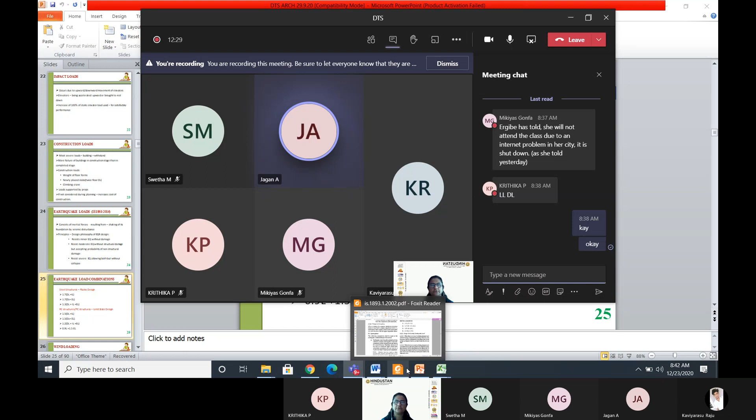Did you download 2016 or which code, IS 1893? 2016, ma'am, let me check it again. Okay. Anyway, 2016 - I have only 2002 with me at present, but there is a slight difference between 2016 and 2002, though the procedure remains the same.

So Jagan will put the 2002 one, see that, you have to refer that. Today I will just share it and go through that IS code quickly.

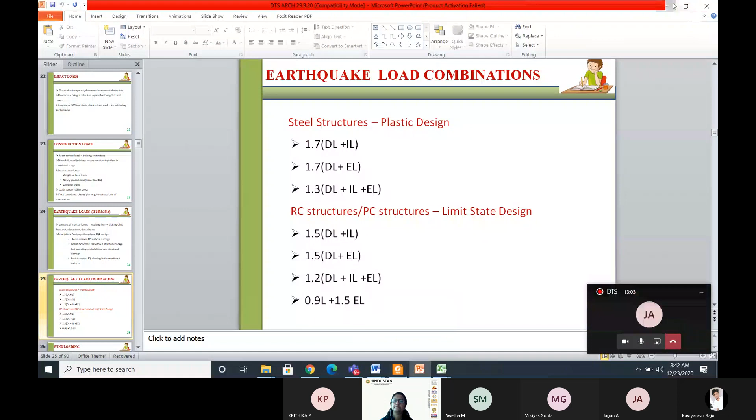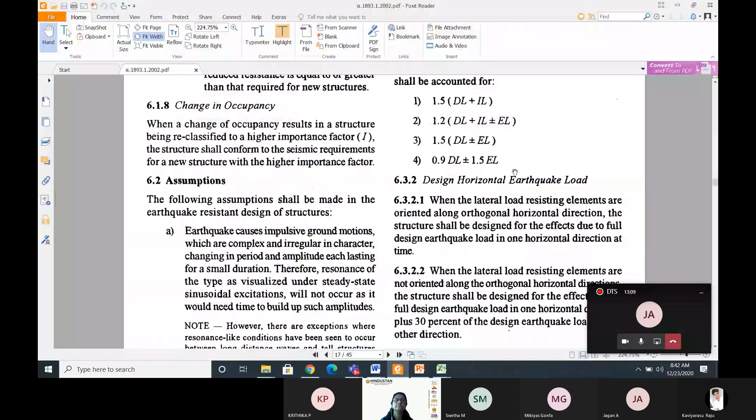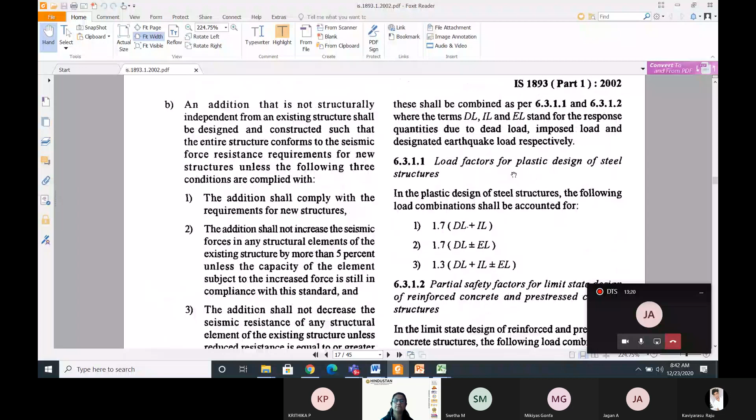Can you see the screen now with the code? Yes, ma'am. So this is your IS code revised in 2002. Ma'am, IS 875 part 3 is 2015, ma'am. And IS 1893 part 1 is 2016. So you have to refer that only.

Okay, yes, next class I will refer that because Jagan will forward that. Uploaded, ma'am, uploaded. You can view that also, ma'am.

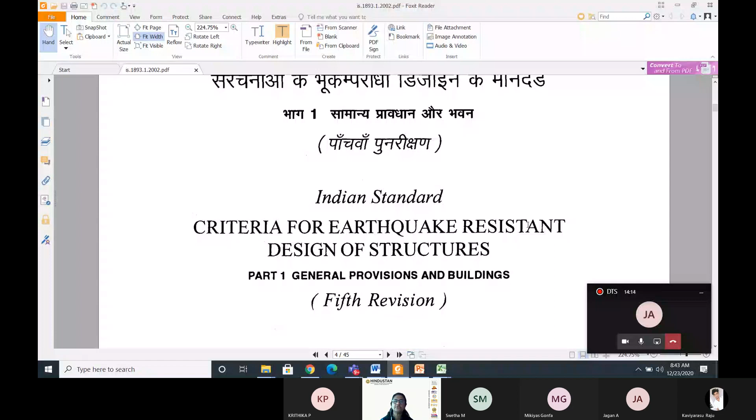Okay, good. So IS 1893 gives the criteria for earthquake resistant design of structures. So all the earthquake load calculations are taken from this particular code.

So everybody should go through the code and understand, because here Part 1 is the general provisions, Part 2 is liquid retaining structures, Part 3 is bridges and retaining walls, Part 4 is industrial structures and Part 5 is dams. We will be dealing with Part 1, the general provisions for buildings.

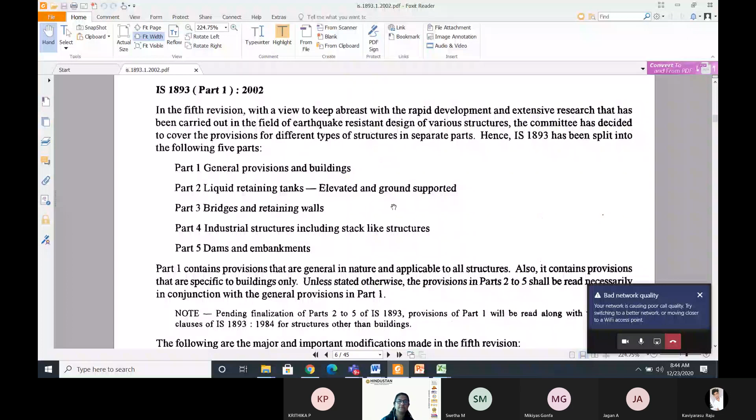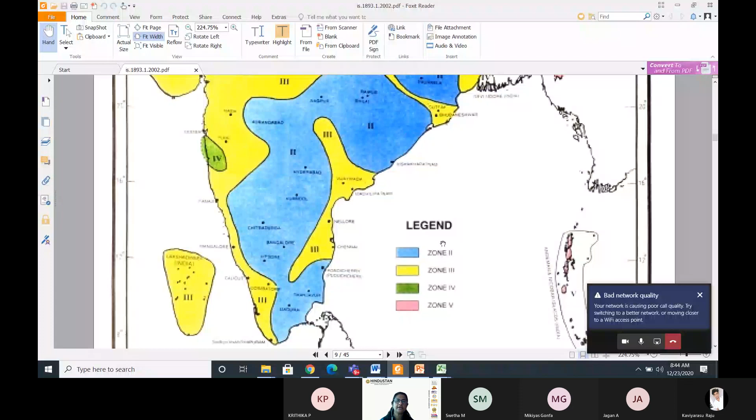Okay, so here you have to refer - I will just show the India map. So here we can see there are zones 2, 3, 4, and 5, and the entire India is divided into 4 zones. Zone 2 is the lowest, and zone 5 is the highest earthquake prone area.

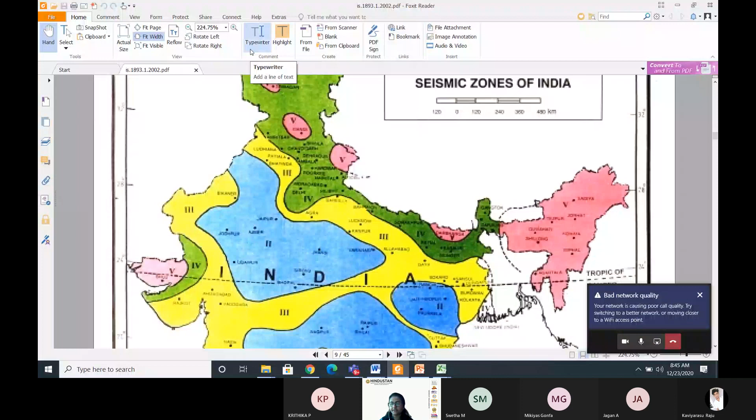So we can see the north and northeast part of India is highly seismic, that is this zone. And here again, the northern part is zone 4. Chennai, we can see, is in zone 3.

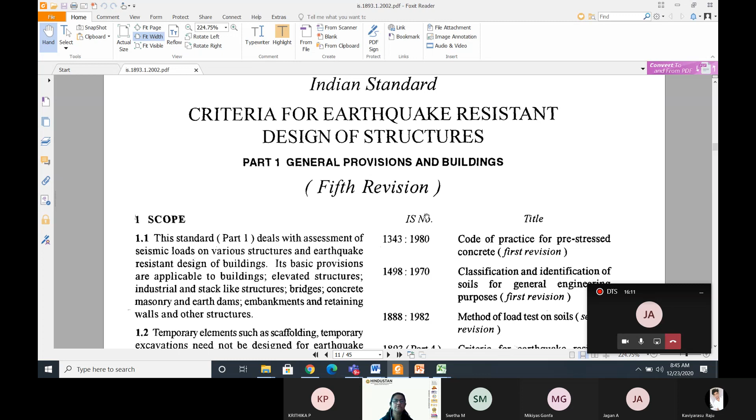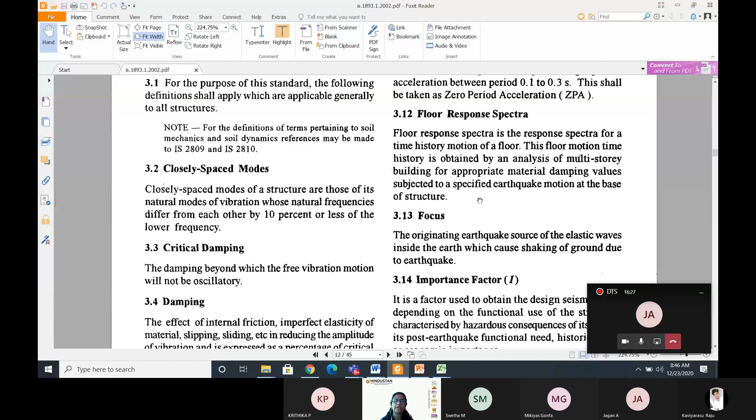Okay, now, terminologies are given here - some terminologies of earthquake engineering. All these things you have to read, because at present your syllabus is concerned with the load and how to calculate earthquake load. So we need to read all these terminologies used - what is importance factor, what is intensity of earthquake, what is liquefaction - all these terminologies, please go through that.

There is magnitude of earthquake - how the magnitude of earthquake is measured, it is a measure of energy, and it is defined as the logarithm to the base 10 of the maximum trace amplitude expressed in microns.

The energy that is released - as I was explaining in the initial classes, when an earthquake happens, the strain energy that is stored in the material, rock in the molten region under the entire tectonic plates, it is moving. So during that motion, whatever energy that is stored will be released. The strain energy stored in the earth material will be released. So that release is the energy.

That energy will travel in the form of waves, in the form of seismic waves. So primary waves, secondary waves, Rayleigh waves, Love waves - different forms of waves. So this energy which is passing in the form of waves.

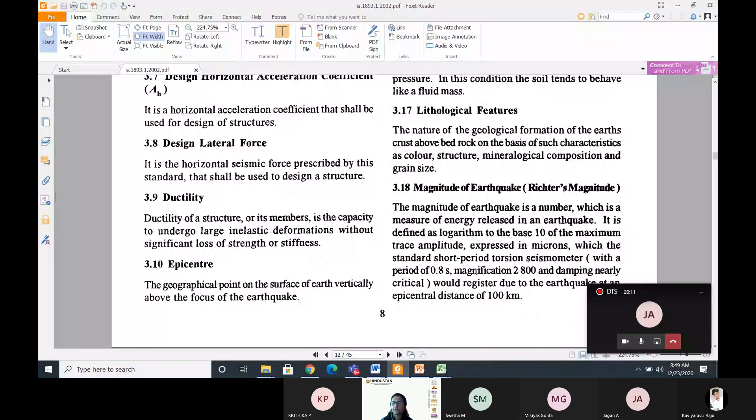The magnitude is usually represented in terms of intensity between 1 to 10 - we say it is 3, 3.3, 4.5, 6.8, 7.9, 9.8. So as it increases, the intensity or magnitude of the earthquake increases. That is what the magnitude of the earthquake is. There are different magnitude measurement systems; what we follow in the Indian standard is the Richter's magnitude.

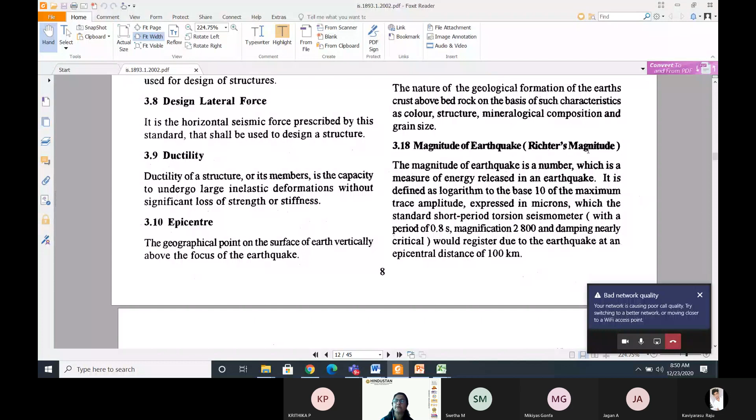So now it goes there. Then finally, I'm not going to explain everything - this is beyond the scope of our syllabus. We have a seismic mass.

How many of you have learned this? Anybody else have learned this? Any? I should know how much I can explain. Other than Kaviyarasu, anybody else learned this earthquake resistant design? Can you hear me?

Ma'am, can you show the slide once again? Please give response - which one? This slide. This one, the code. Are you not able to see the code? Yes ma'am. I'm asking about this code provisions.

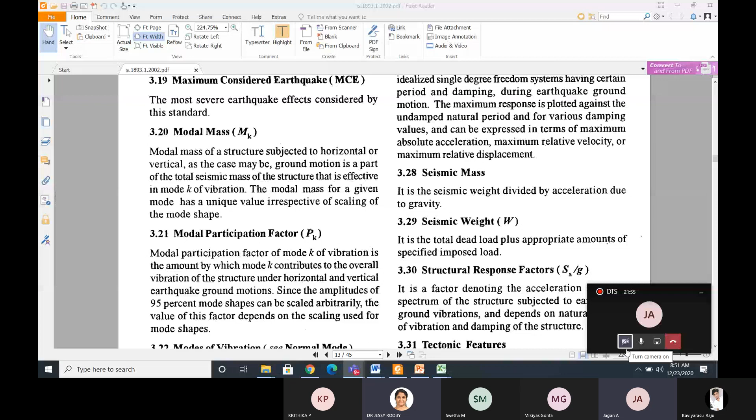How many of you have learned this in your UG class? Did they learn it? Ma'am, I don't remember ma'am, maybe it would have come in structural dynamics in 7th sem ma'am, I don't remember ma'am. That must have been it - so you others also, Swetha and Krithika? Ma'am, no ma'am, no. Okay. Mikias.

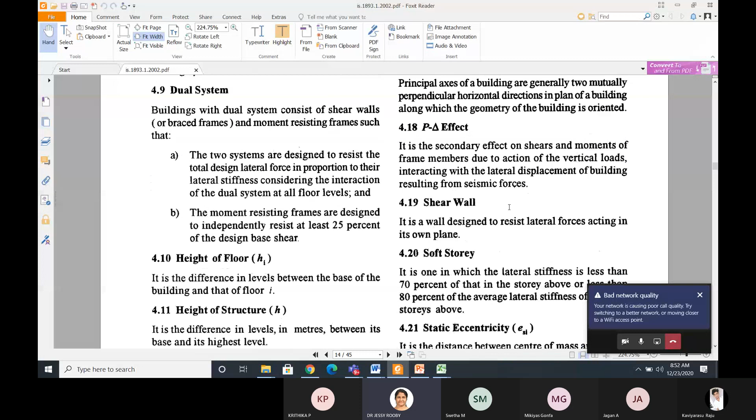Think - okay, so structural dynamics. There was one unit like the initial engineering seismology, isn't it? So please go through this. We'll derive the earthquake load, how to calculate the earthquake load. So here there are some terminologies available, the general principle of how earthquakes are happening - what I was explaining just now.

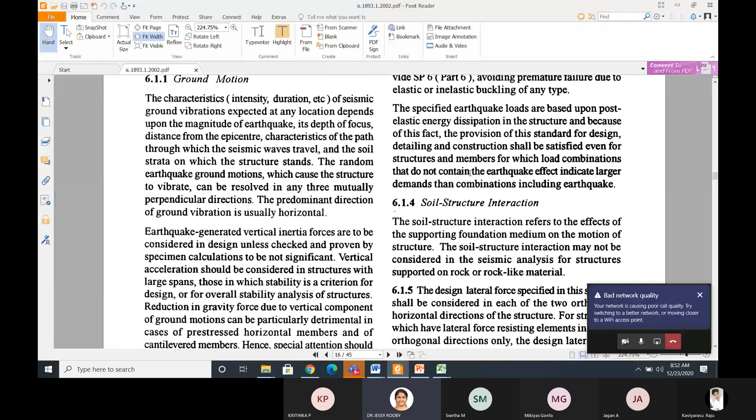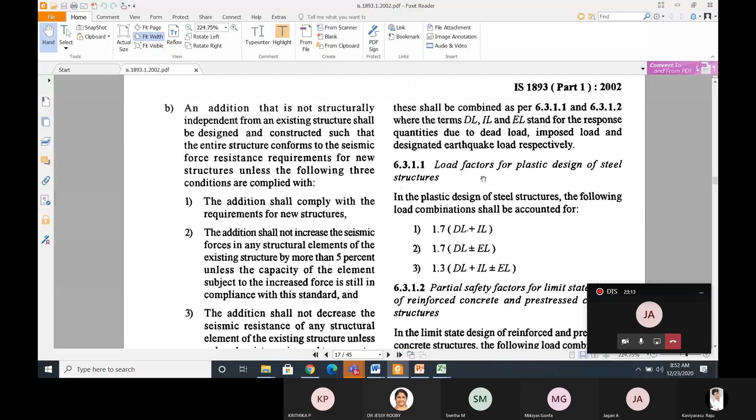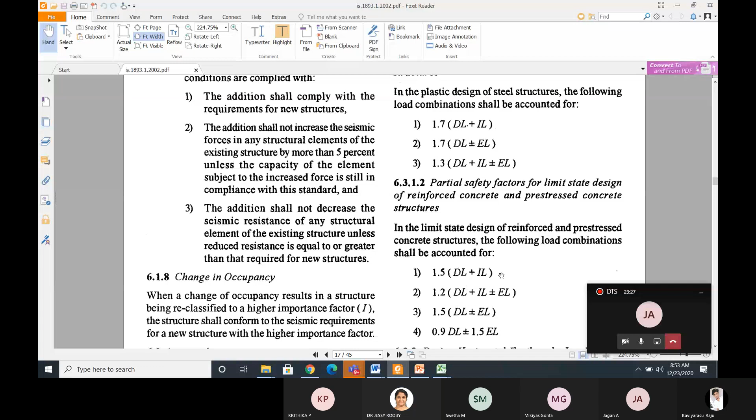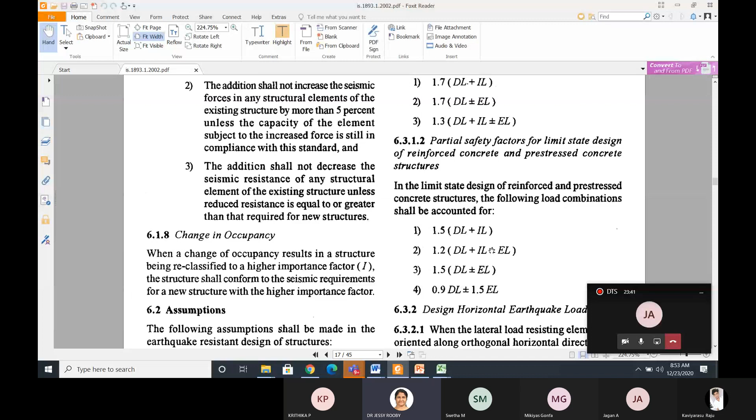Now here, this is what I am interested in, our design of tall structures - how do you consider the load? I have explained the load factors for plastic design of steel structures, and if it is for an RC or pre-stressed structure, how the load has to be taken. In the last 1.5, all these are the partial safety factors for dead load and live load. If there is an earthquake load also coming, the partial safety factor is less because I told you both will not act simultaneously, so the partial safety factor can be less. Now there is one more here.

If lateral load resisting elements are not oriented along the orthogonal directions—that means if there is a shear wall, or columns or any other solid vertical elements in all directions to resist the earthquake—then we can't predict that the earthquake will come only in the X direction or only in the Y direction. There are different types of waves: some travel longitudinally, some in other directions, so the structure will be affected. We cannot predict exactly which direction the earthquake forces will be in, so we need to take all directions: X, Y, Z. Depending upon that, the earthquake load also has to be taken, as I was explaining last class.

The predominant direction, we can take 100% force in the X direction plus 30% in the Y direction. And here everywhere you can see a plus or minus. Can you tell me why the loads are taken plus or minus?

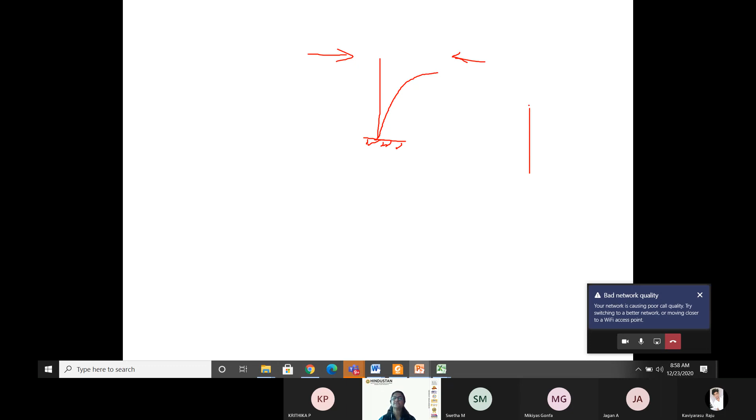So this earthquake load, suppose if it is coming here, the building can move in this direction. At the same time, the load can be in the opposite direction also. So if a structure is there, your dead load is also acting in the downward direction, and your live load also—so this is my gravity direction, this is my positive direction. So this is the dead load plus live load.

You cannot say live load is always in a different direction—it's a gravity load, downward direction. So your dead load and live load will always be added together, because this direction cannot change. The dead load is always gravity towards downward, live load is also in the downward direction. So it is always dead load plus live load.

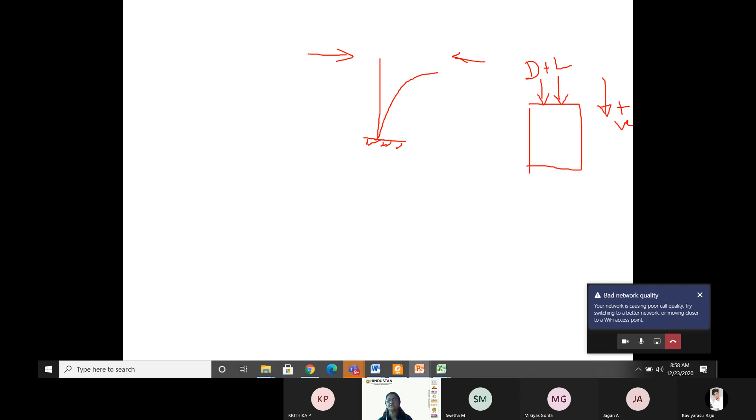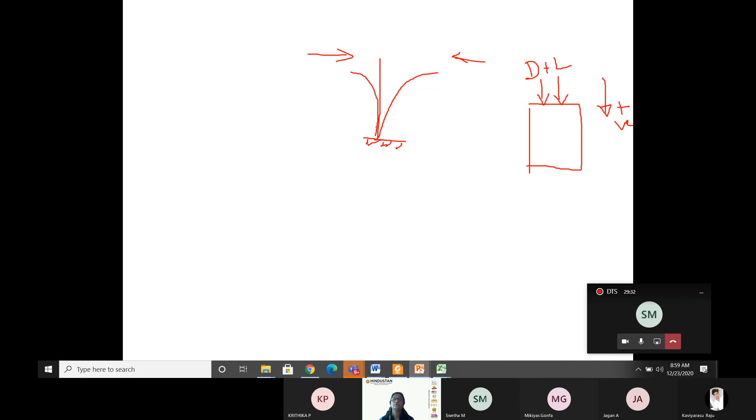But when there is an earthquake, I cannot say it's only one direction of load. The earthquake can come either in this direction or in the other. Depending upon that, the building will sway this way or that way—it may move in then move onto this direction, then come back here. So it is like a cyclic load pattern.

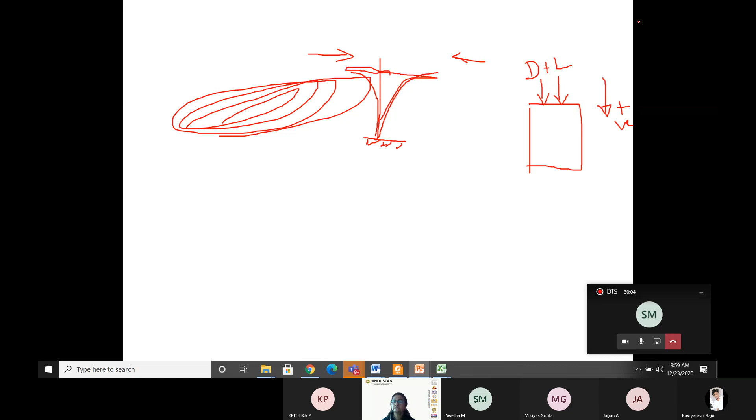Here it is coming, it can be in the plus direction or it can be in the minus direction. Is it clear? Is it understood? Yes, ma'am. Hello, please give immediate response.

What Mikiyas is telling—there's a different code called EBCS. Can you explain, can you expand it, Mickey? So in Ethiopia... maybe I don't know the expansion of that. So depending upon the country, that's what I told you—this is different, because there's another code in Japan. We cannot follow the Indian standard there because earthquakes occur frequently in Japan, so their codal provisions are entirely different from those of India. So you people should refer to other countries' codes as well, because we are in India learning about the Indian standard—this standard can be used only when... regarding the Ethiopian building codes, you should refer to those instead.

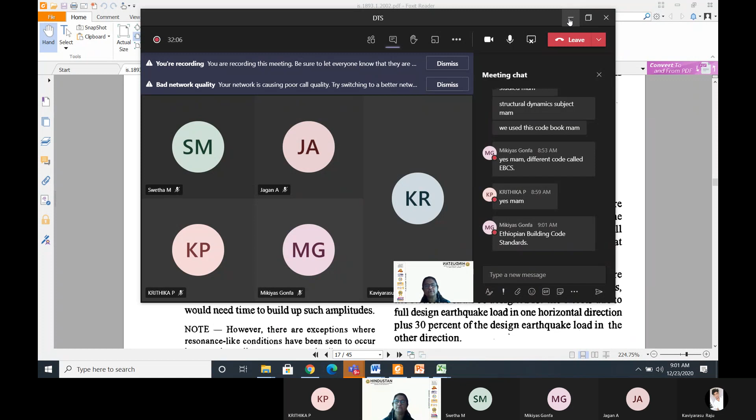Very good. So in India, we have a national building code, NBC. Based on NBC only, we do all the construction. All your size, carpet area, entire building standard is given by the national code. Similarly, every country will have a different code. You have to refer to it whenever you need these things. That is how you improve your knowledge.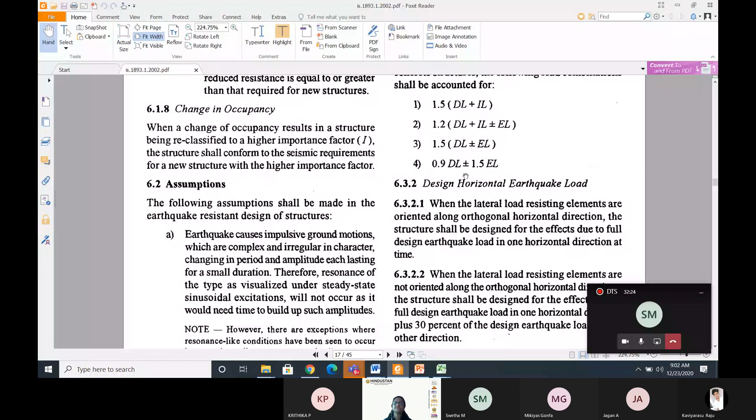So what we are discussing here is that there are different load combinations available. Depending upon this, there can be a number of load combinations: X direction, Y direction, 100% in X direction, Y direction, 100% in Y direction. There are almost 25 load combinations possible with dead load and live load along with the earthquake load, if we consider it. The X direction, Y direction, Z direction, 100% load in one direction, 30% load in another direction - if you take all the combinations, we can derive almost 25 combinations.

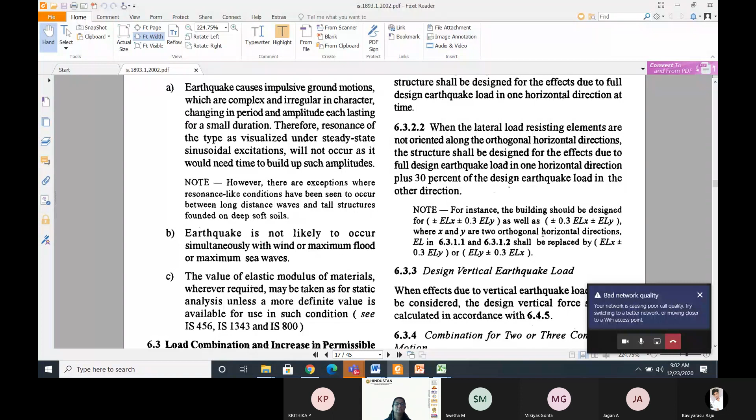All these load combinations you have to do for the analysis. Out of that, whichever gives you the maximum load has to be considered. So here, if there is X direction, Y direction, Z direction: 100% in the X direction plus or minus, then load in the Y direction plus or minus 30% load in the Z direction. Then I'll change it to 100% in Y direction, 30% in X and Z direction. Then again 100% and 30% along with the X Y direction. So all these combinations are possible along with the dead load and live load, where X and Y are the two orthogonal directions and Z is the vertical direction.

Sometimes the vertical direction is usually less significant than the lateral load, either in the X direction or in the Y direction. Z direction effects are very minimum.

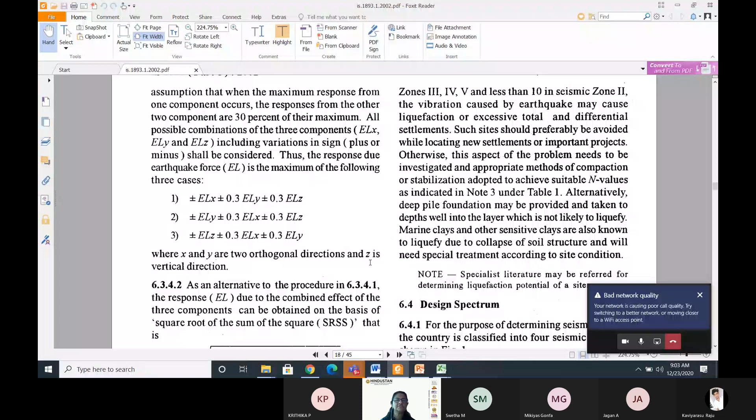So instead of taking all these combinations into consideration, there's an alternative method. Earthquake load can also be calculated as square root of sum of squares - we call it SRSS. So this is an alternate way to calculate the earthquake load: square root of X direction square plus Y direction square plus Z direction square. As an alternative to the procedure discussed previously, the response earthquake load due to the combined effect of the three components can be calculated this way.

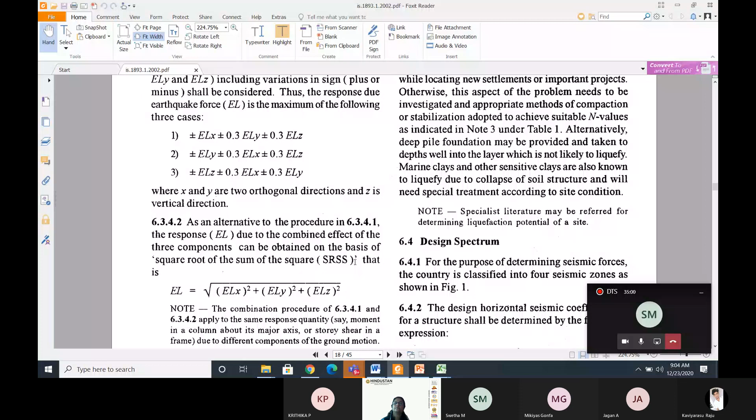So there are different ways you can calculate the earthquake load. That is more important if the building is in an earthquake region, and especially if it is a high-rise structure. Then we move on to the other important point.

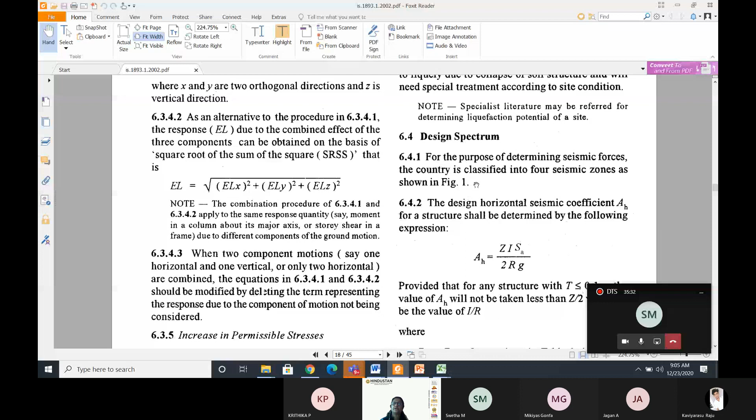For the purpose of determining the seismic forces, the country is classified into 4 seismic zones - I told you, zone 2, 3, 4, and 5. Then the design horizontal seismic coefficient for a structure shall be determined by the following expression. This is more important - everybody should learn this. You must have used it. Those who have not used it, this is called horizontal.

AH represents the horizontal acceleration seismic coefficient. Because the load is a lateral load, this is a force, so there should be a seismic coefficient to calculate the earthquake load. That seismic coefficient depends upon four factors.

One is called Z. Z is known as the zone factor, which is given in the code. The I represents the importance factor.

Importance factor depends upon the importance of the building - whether it's a residential building, a hospital building, a community hall, or a nuclear power plant. Depending upon that, because you know exactly - if it's a residential building versus a nuclear power plant, if there is any damage to a nuclear power plant, there will be radiation, or if it's a thermal power plant or other such power plants, the gases will leak. There will be a lot of loss of lives. So I represents the importance factor.

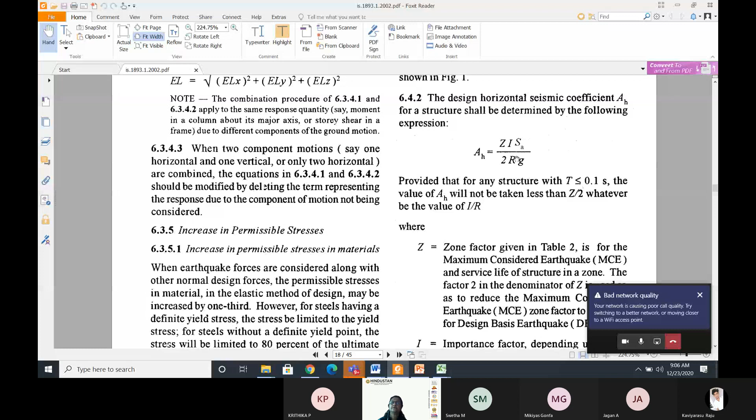Then here you can see R. Capital R represents - I is the factor characterized by the hazardous consequences of its post-earthquake functional needs, historical value, or economical importance. This R represents response reduction.

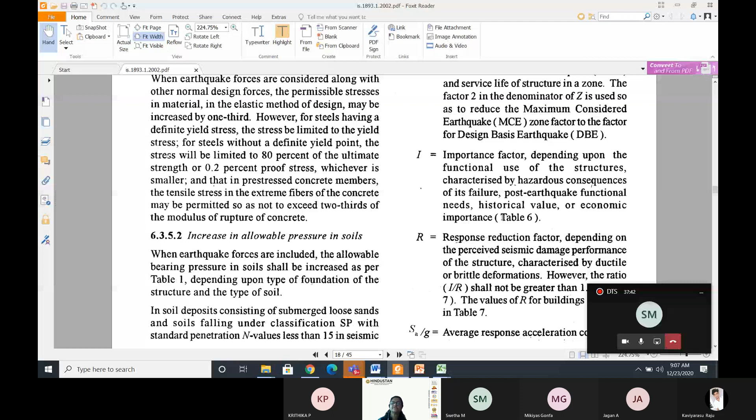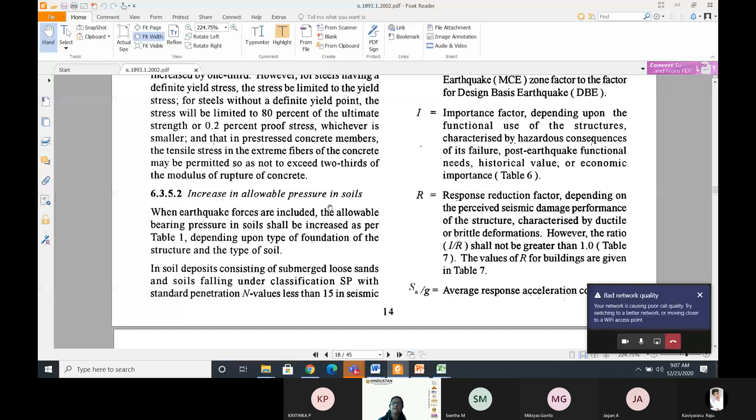I'll explain these things a little later. Response reduction factor depends upon the type of structure - whether it is a normal moment resisting frame, a masonry structure, a timber structure, or a completely special shear wall structure. Depending upon the structural system, the R value will be calculated. Then there is another term called SA by G.

SA by G is one term, divided by 2R. SA by G represents the average response acceleration coefficient that depends upon the soil type and the time period.

Every structure will have a mass, and that structure will have a stiffness. Stiffness depends upon the moment of inertia, the dimension, and the height. So every member will have stiffness and mass, and based upon the stiffness and mass, there will be a frequency and a time period for that particular structure.

I hope you are able to understand this, since you must have learned it before. Are you able to follow me? Yes, ma'am.

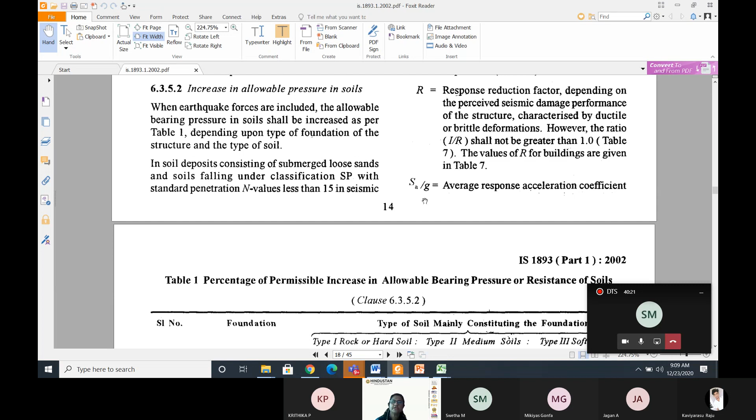Whatever I am talking about now is actually a separate subject, so I'm taking only a small part from it. This SA by G, the average response acceleration coefficient, depends upon the time period of the building and the type of soil. Sometimes it can be rocky soil, medium soil, hard soil, or soft soil. There are different types of soil available.

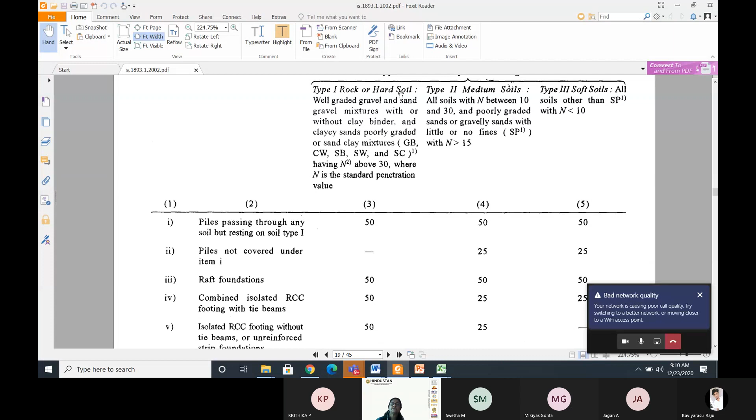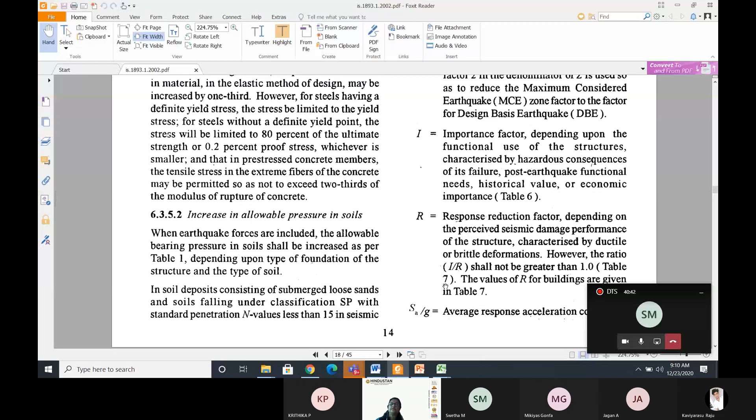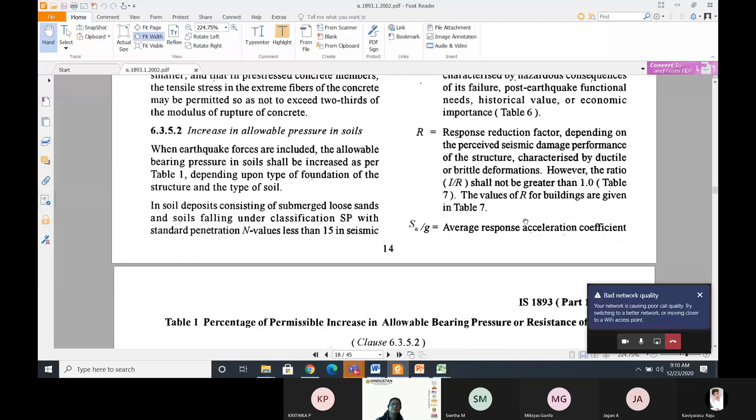Let me show you the zone factor. If the building is in zone 2, the zone factor is... if it's zone 3, 0.16. Zone 4 it is 0.24, and zone 5 it is 0.36.

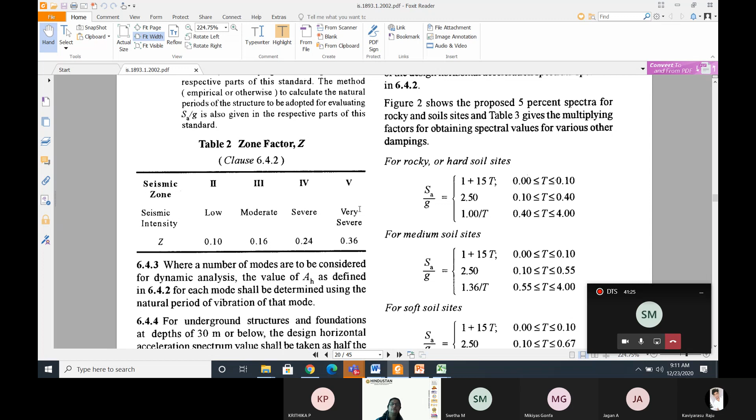It represents low, moderate, severe and very severe zones. Now what about the importance factor?

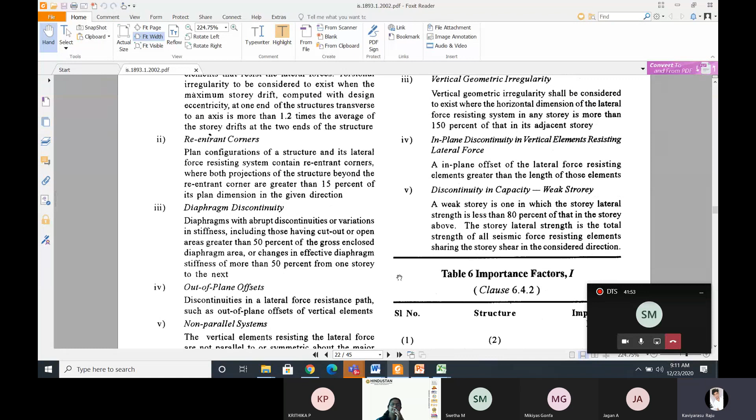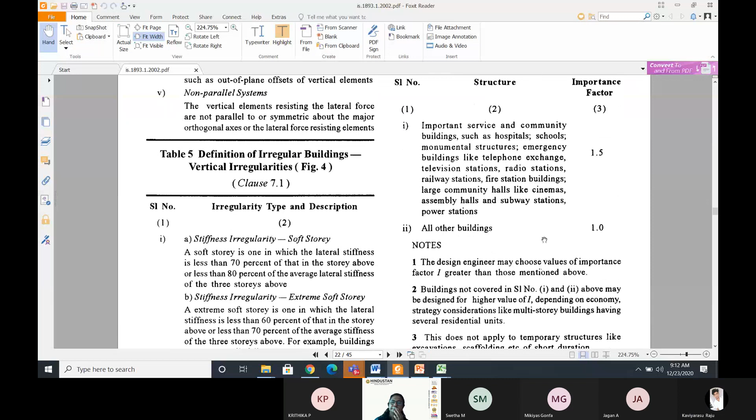Tell me, you're breaking up, ma'am. My voice is breaking? Yes, ma'am, the entire video. For everybody? Yes, ma'am. Okay, so you didn't hear what I said, is it okay now? Is it clear now? Yeah, but only for 5 to 10 seconds, then it starts breaking, ma'am. I'm out of station, so there are some network issues here. That's why I mentioned it initially. At least can you see the screen? Yeah, it's visible, ma'am.

For important structures like hospitals, schools, monumental structures, emergency buildings, telephone exchanges, radio stations, community halls, power stations, and all such buildings, the importance factor is taken as 1.5. For all other buildings, it is taken as 1.

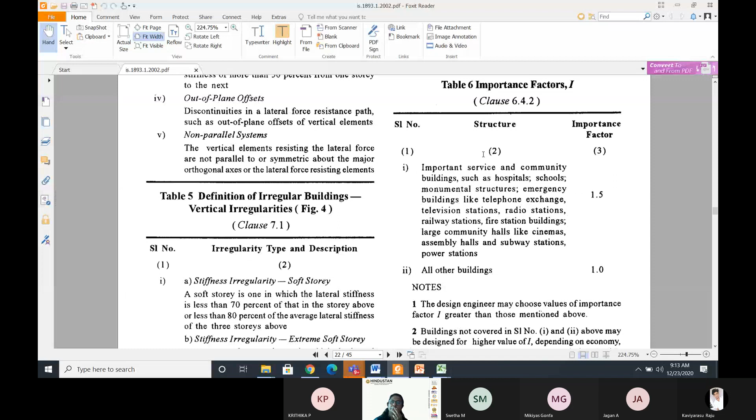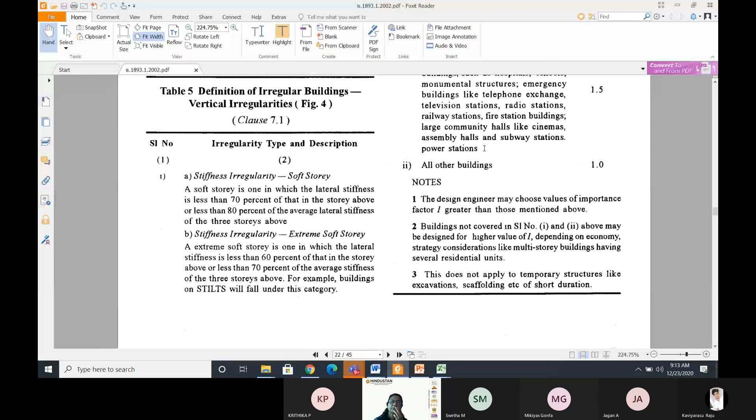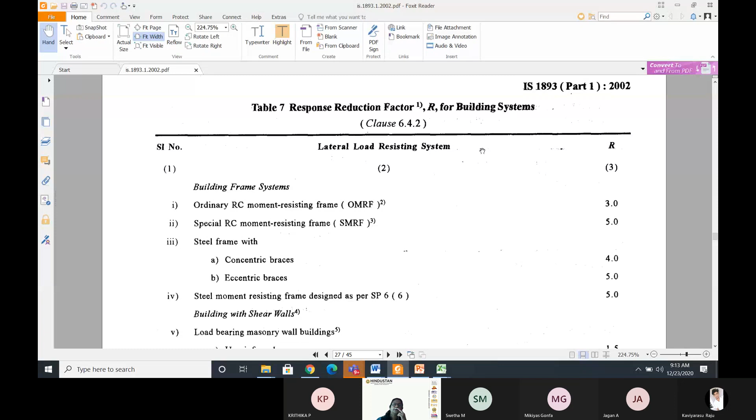Next was ZI, then what is R? R is the response reduction factor. I'll show you. Can you see this table 7? Yes, ma'am. So here you can see the response reduction factor for buildings.

You can see different building systems available here. One is called ordinary - a normal framed structure with only beams and columns, no other special elements. A normal moment resisting frame has a response reduction factor of 3. Now, if it's a special moment resisting frame, meaning some additional elements are provided to resist the load, special features added to the moment resisting frame, then the value of R is increased to 5.

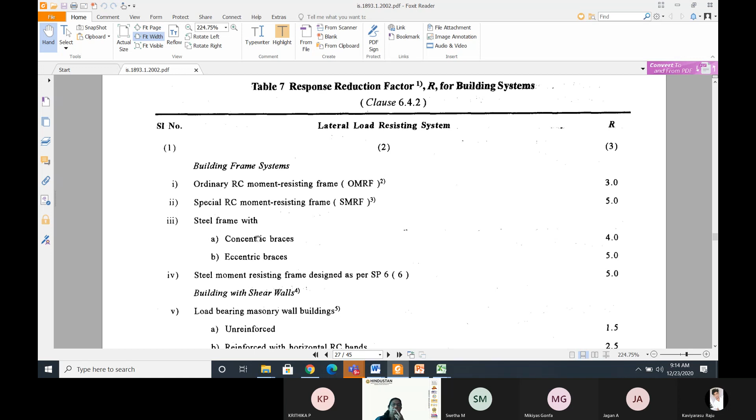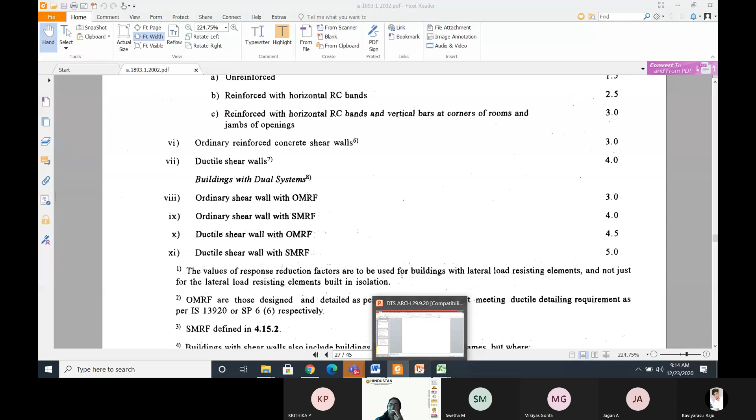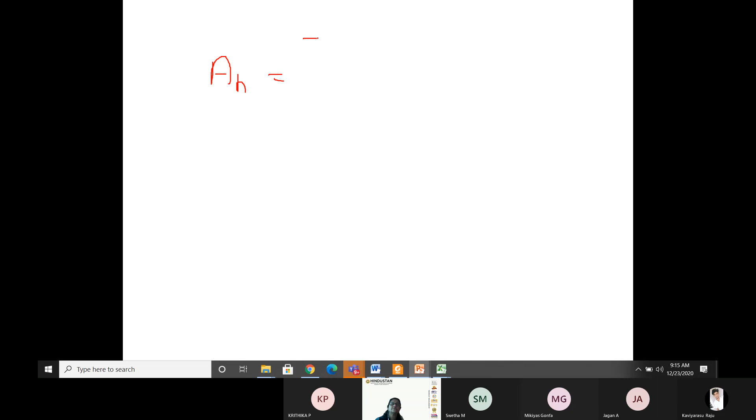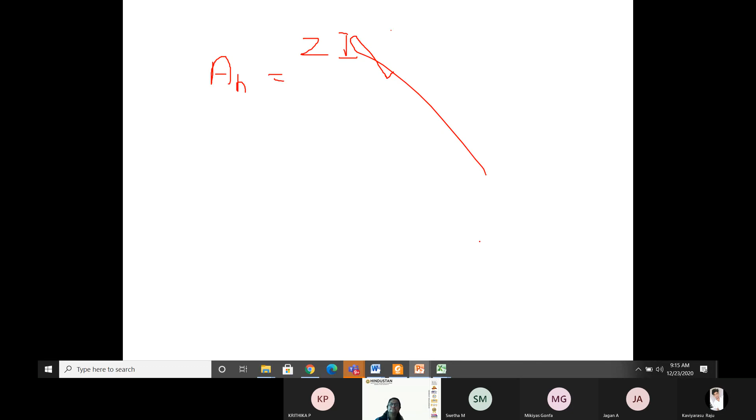Now I'll tell you the importance of this. I'll explain once again. What was the equation? Can you tell me? AH is equal to Z into I into SA by G divided by 2R.

This is called AH, the acceleration. The earthquake load is actually calculated as AH into W - we have to calculate the seismic load. Here W is called the total weight of the building, considering all the masses, all the structural elements' mass together. So if you multiply AH with the value of W, you will be getting the seismic load.

Now tell me, Z is the zone factor. I is the importance factor - if the building is very important, your importance factor is 1.5. Now R is called the response reduction factor. Where is the R value in this equation? In the denominator.

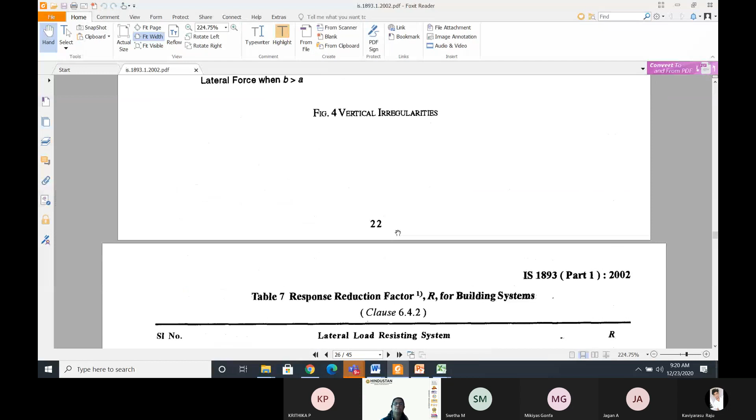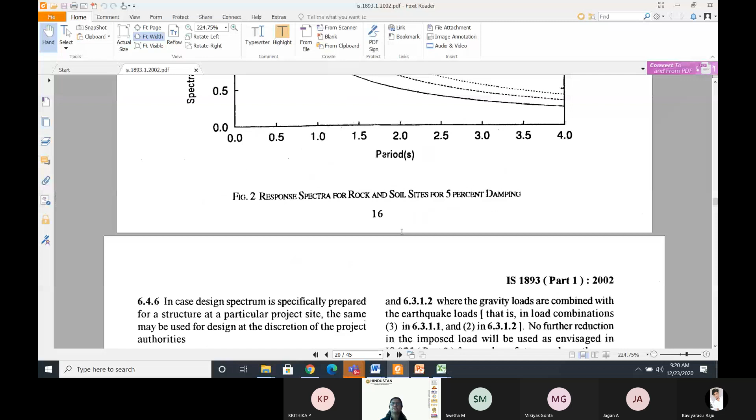Then about your SA by G. You can see here how to calculate the SA by G. So I told you, SA by G depends upon the type of soil, whether it is rock or hard soil, and as well as the time period T.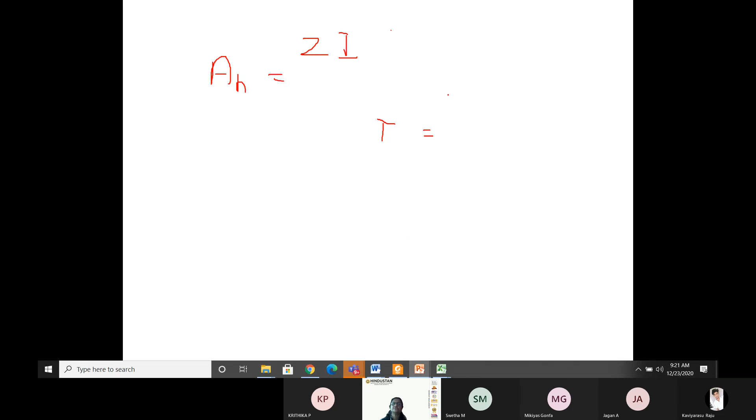So time period, there is another formula here. Time period can be calculated. Time period T is equal to, there is a formula, in structural dynamics, T is equal to 2 pi by omega. Do you remember this formula? Time period, T is related to the natural frequency of the building.

How do you calculate omega, the frequency of the building? Omega is equal to square root of K. I hope you remember all these things you learned in structural dynamics. Omega is equal to square root of K by M, where K is called the stiffness of the element and M is the mass. Once you know the stiffness and mass of the building, you can calculate the frequency, and once you know the frequency, the time period T can be calculated.

That is one way. The code also gives another empirical formula. T is equal to, I'll show you in the code book, it is there towards the end: 0.1 times n, where n represents the number of stories.

What if we have a 10-story building? What will be the value of T? If you have a 10-story building, how can we take the T value? Can you hear me? If the number of stories is 10, what will be T? 1 second, ma'am, isn't it? Time period is 1 second. If it is a 100-story building...

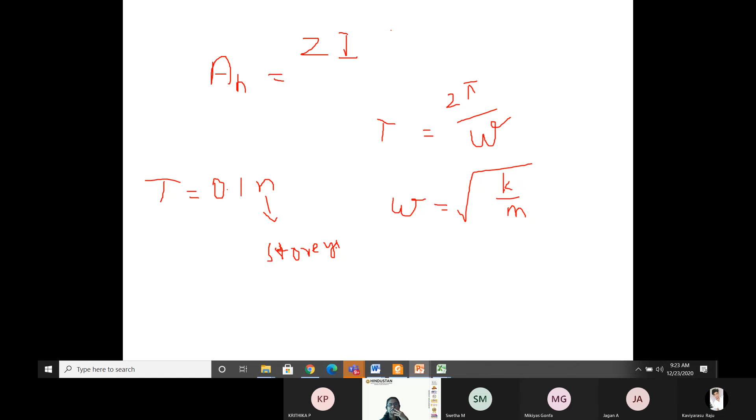It would be 10 seconds, isn't it? So accordingly, if you know the number of stories, T can be directly calculated. Or, if you know the stiffness and mass of the building, you can calculate the time period.

So once you know the time period, and if you know the soil type, your SA by G can be calculated. If the time period is between 0 to 0.1, then this is the first formula, 1 plus 15T. If the time period is between 0.1 to 0.4, then it is 2.5. If the time period is between 0.4 to 4, then it is 1 by T.

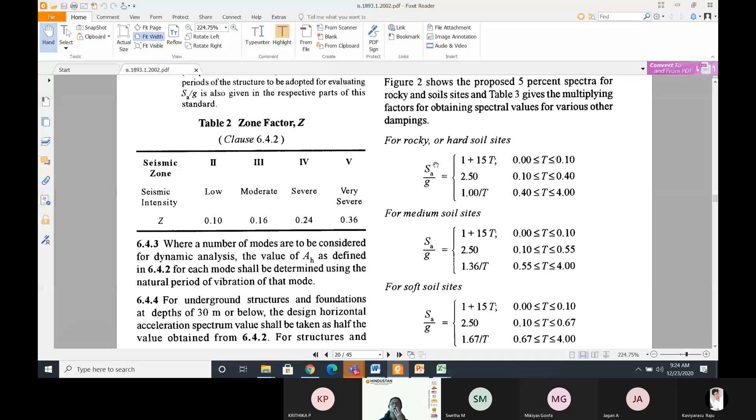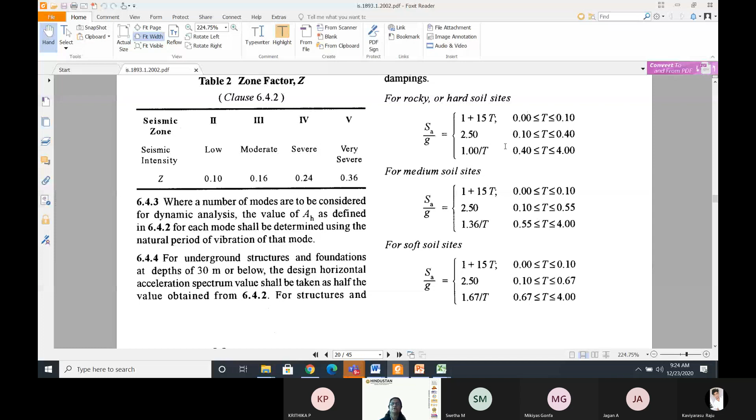Okay, so this is how you calculate the SA by G, and for the soft soil, you can calculate the SA by G similarly. So all the three terms, now you know how to calculate them. Z is from the zone factor table. SA by G, from this empirical relation you can calculate, and R from the response reduction factor table, Table 7. So once you get all these 4 values, your AH value can be calculated.

So this is the SA by G. From the expression also you can calculate it, or from the response spectrum graph also you can calculate it. You can see the time period here, and this is the SA by G, for type 1 hard soil, medium soil and soft soil.

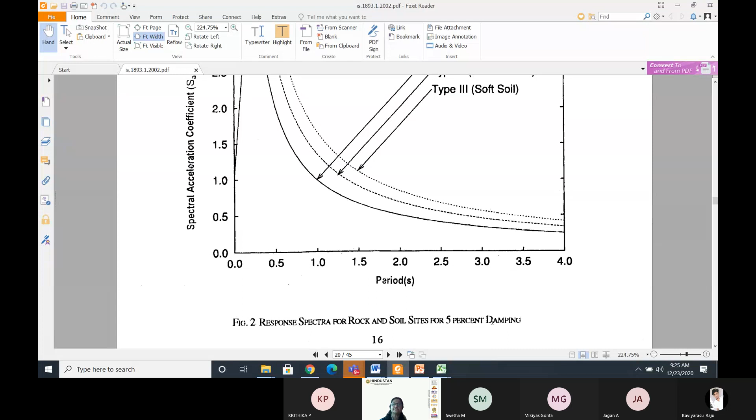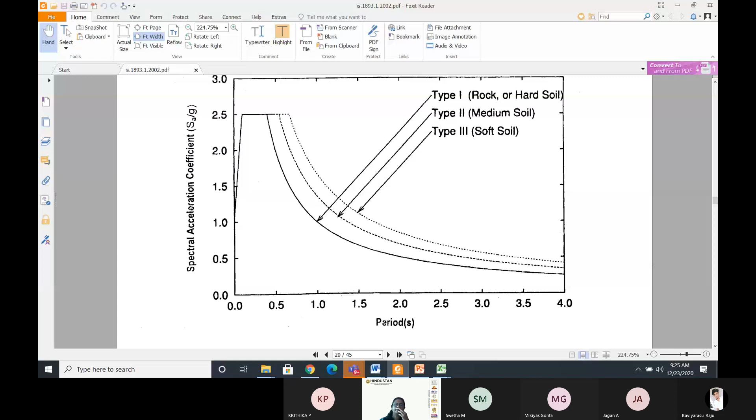So this curve is called the response spectra for rock and soil sites for 5% damping. What does it mean by damping? What is damping? Can you tell me what is damping? Does anyone have an idea?

Do you have any idea what is damping? Have you heard of this term? Is it settling of the soil or a building, ma'am? No.

Your earthquake building course, actually it is completely related to your structural dynamics course.

When there is an earthquake, the seismic waves will be traveling, isn't it? Take a tuning fork, give it a vibration, what will happen? It starts vibrating and finally it will come to rest, isn't it? The tuning fork experiment, or simple harmonic motion, your pendulum experiment. Do you remember?

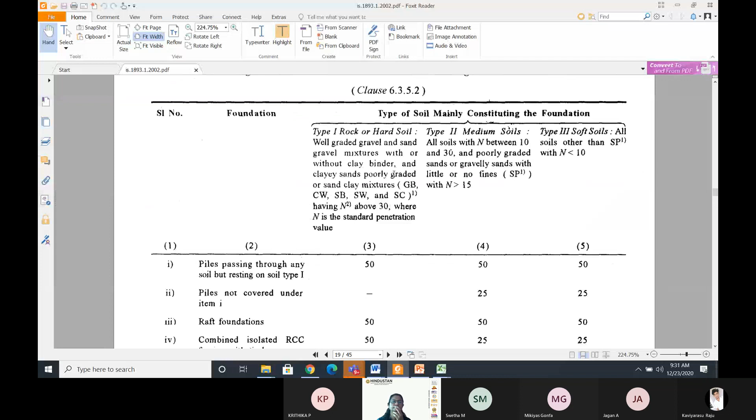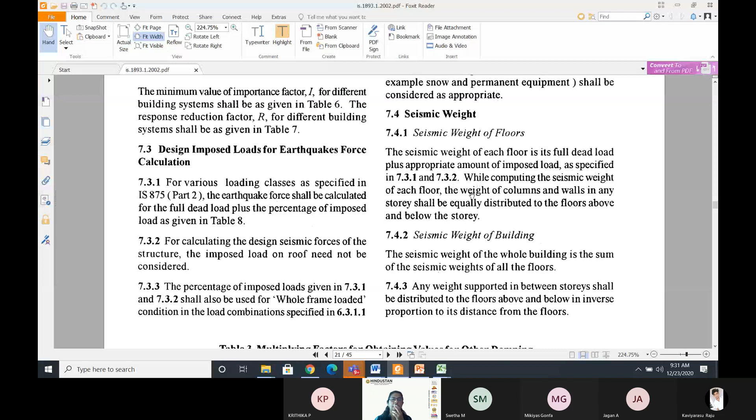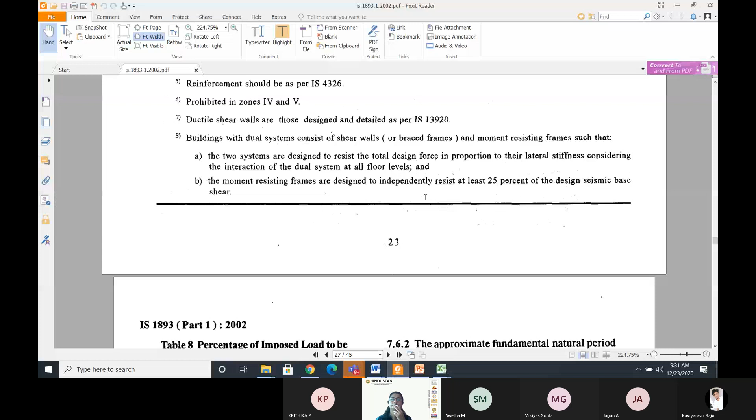Once the AH is calculated, your seismic weight W can be calculated. Once you calculate that, there's another formula: T is equal to 0.09 by square root of D.

So there are many ways you can calculate the time period of the building. There are many formulas given here.

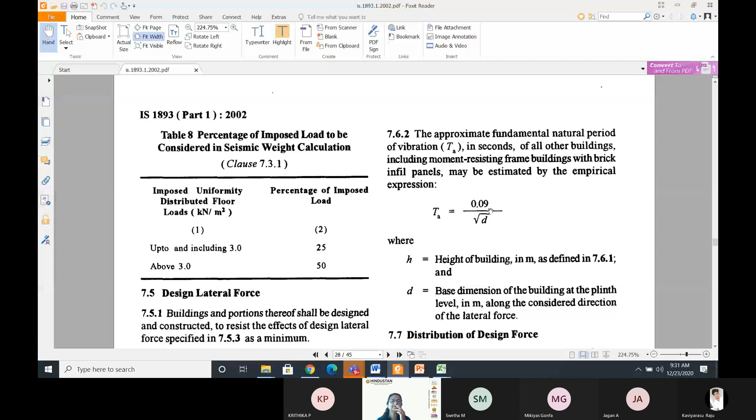Now the design seismic base shear - what is the total force that is coming at the bottom of the building? VB is equal to AH into W. This shear we can distribute, and you can calculate how the earthquake load is applied at each floor of the building.

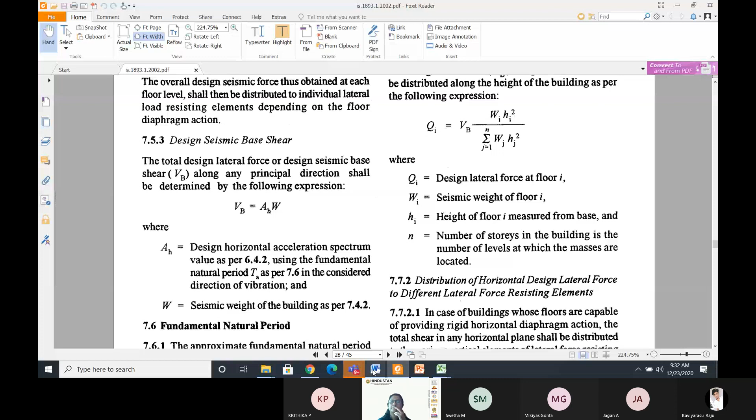Are you able to hear me? I think my voice is breaking in between.